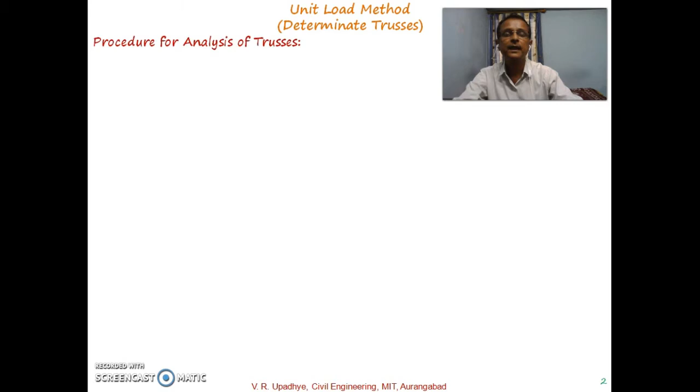In the earlier lecture we discussed the procedure used for analysis of trusses using the unit load method, for finding horizontal or vertical deflection at a particular joint. We will again go through the stepwise procedure.

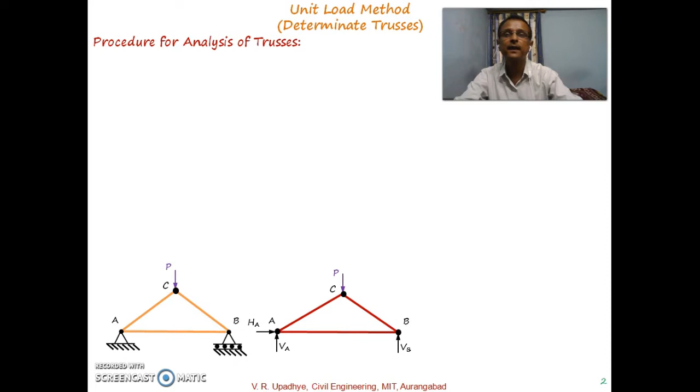Say a truss is subjected to a point load P at, for example, joint C as shown in this figure. At B there may be horizontal deflection taking place, and if we want to find the horizontal deflection due to the forces, first of all we find the reactions at the supports due to the applied external forces.

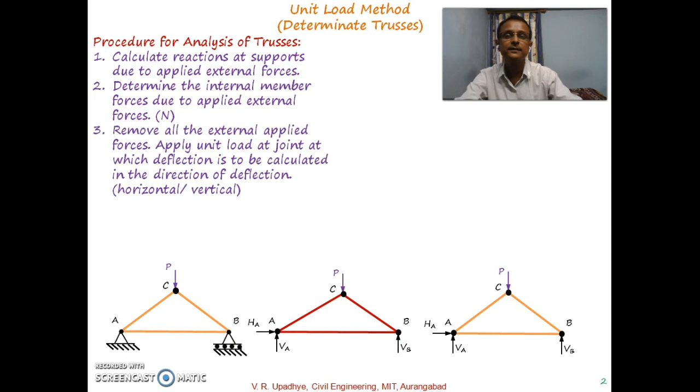We go further to find the internal member forces due to the applied external forces, and then we remove all the externally applied forces and apply a unit load at the joint where deflection is to be calculated, in the direction of the deflection.

For example, if we are interested in finding the horizontal deflection at joint B, we remove the externally applied forces and apply a unit load at that particular joint in the direction in which the deflection is to be calculated.

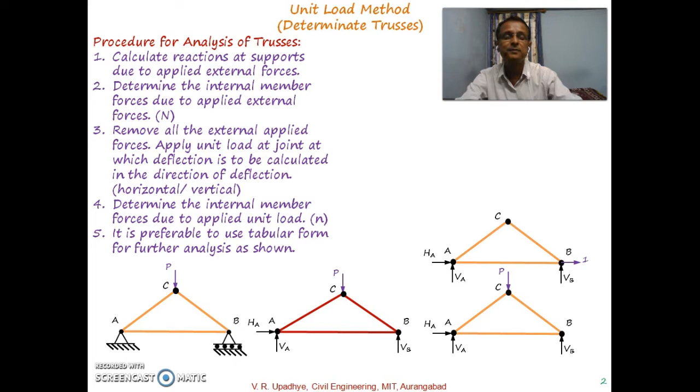Then, as shown in this figure, we find the internal member forces due to the applied unit load at that particular position. Then we set up a table. It is preferable to use a tabular form for further analysis, as shown here.

The table has columns: member, then capital N, which stands for internal member forces due to applied external forces, and small n, which stands for internal member forces due to application of the unit load at the joint in the direction where deflection is to be calculated.

Capital A stands for area of cross section of that member, and capital L stands for length of that member. We then calculate N, n, L divided by A. If Young's modulus is different for different members, we need one more column for it; otherwise, if it's the same, it's not required in this calculation.

We then take the summation of that column to find delta, which is the summation of N, n, L divided by A. With this, we will go through a second numerical regarding this method.

We need to take proper care of units. If N, the internal member force due to externally applied forces, is in kilonewton, and area of cross section is in millimeter square, and length is in meter, then while substituting everything in the final calculation, convert everything consistently, for example into Newton and mm, so the answer comes out in mm. You need to take care of the units used for N, small n, area of cross section, and length of the members. So we will go through one more numerical on this methodology.

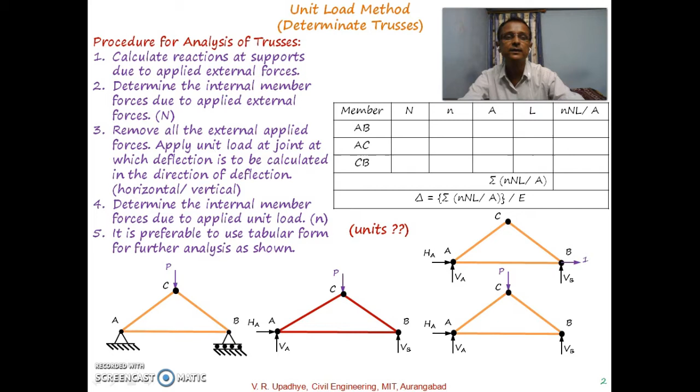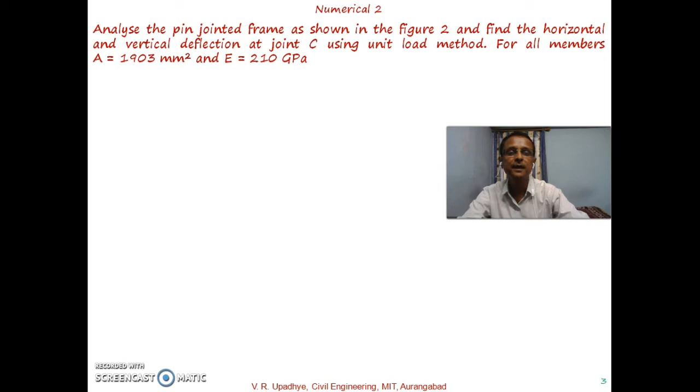This is the statement of the numerical: analyze the pin jointed frame shown in figure 2 and find the horizontal and vertical deflection at joint C using the unit load method. For all members, area of cross section is 1903 millimeter square and Young's modulus is 210 gigapascal. This is the diagram given.

What we have is this truss with 5 members: AB, BC, CD, AD and BD, with supports as shown in the diagram - one is a hinge support and the other is a roller support.

It is subjected to external forces: 18 kilonewton vertically downward at one joint, again 18 kilonewton at C, and at joint B there is one more force applied, 12 kilonewton inclined at 40 degrees. With this we go to the solution: initially we need to find the reactions due to the externally applied forces.

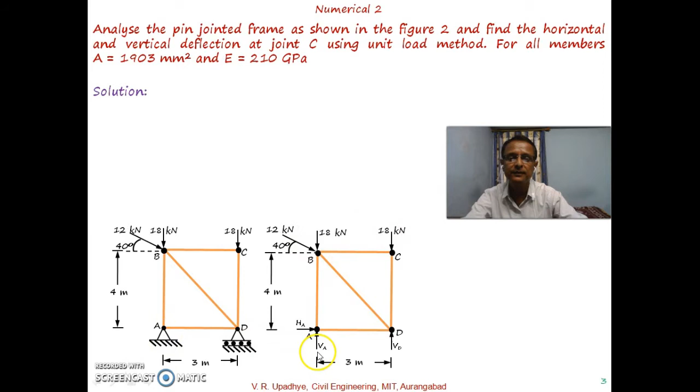So you will be having two reactions over here as it is hinge support, so we will be having vertical reaction as well as horizontal reaction. And as D is a roller support, we will be having one vertical reaction over here. So reactions at supports are as shown in figure 2A and figure 2B.

If the vertical reaction at D is to be calculated, you need to apply summation of moments about A equal to 0. Going through this figure, we have an 18 kilonewton force at C, an 18 kilonewton force at B, and at B one additional inclined force, 12 kilonewton at 40 degrees.

It is converted into its two components, horizontal and vertical. The horizontal component becomes 12 into cos of 40, which calculates to 9.193 kilonewton, and the vertical component is 12 sin 40, which comes to 7.713 kilonewton.

After these calculations, if we apply summation of moments of all the forces about A equal to 0 at support A, we get an equation like this. For the force 9.193, the component 9.193 into 4 gives the moment about A. The 18 kilonewton force and the vertical component of the 12 kilonewton force pass through point A itself, so their moment is 0 about A.

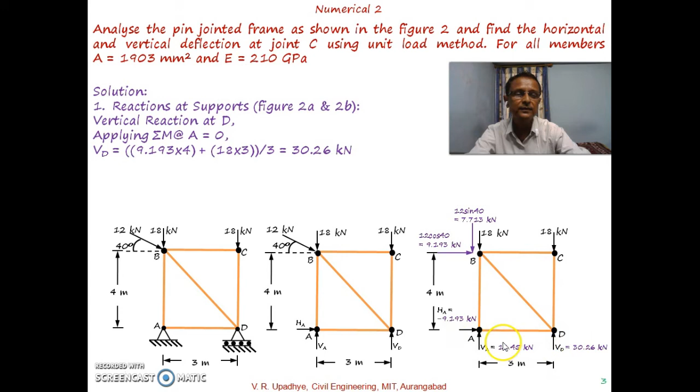So VD becomes 9.193 into 4 plus 18 into 3, divided by 3. That calculation gives the reaction at support D as 30.26 kilonewton.

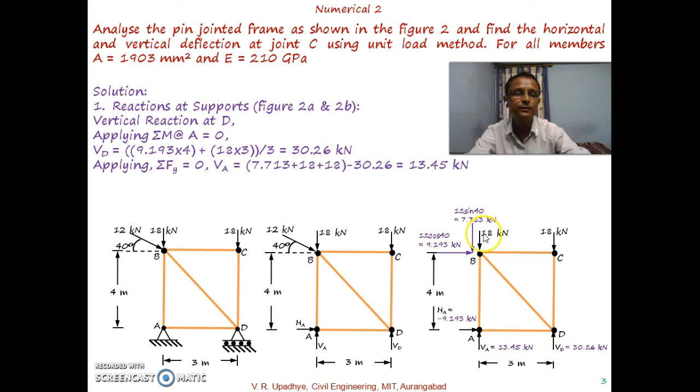Now we can apply summation of forces in the y direction equal to 0. So VA plus VD must equal 18 kilonewton plus 18 kilonewton, plus 7.713, the vertical component of the 12 kilonewton inclined force. So VA becomes 7.713 plus 18 plus 18, minus VD, which is 30.26, giving the vertical reaction at A as 13.45 kilonewton.

Similarly, the other reaction at support A is horizontal. Applying summation of forces in the x direction equal to 0, there is only one horizontal force, the horizontal component of the 12 kilonewton force, which is 9.193 kilonewton. For summation of x equal to 0, the reaction in the x direction must be opposite to that, so it is minus 9.193, or in the negative direction. That is the horizontal reaction at A, 9.193 kilonewton in the other direction.

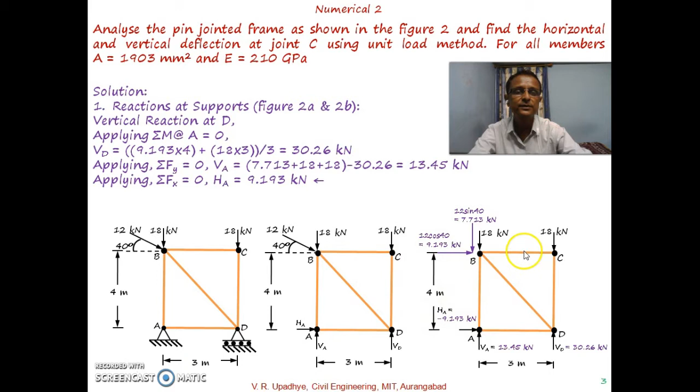With these reactions calculated, what we need to go for next is finding the member forces due to the applied external forces. So we'll go for that.

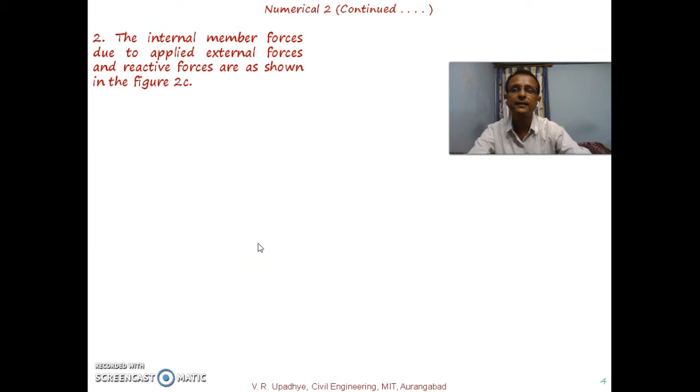The internal member forces due to applied external forces and the reactive forces are as shown in figure 2C. Here we will have some internal forces. To calculate this, considering joint A and its equilibrium using the method of joints, I will have member force FAD horizontally and member force FAB vertically. Since this reaction is in the negative x direction, the member force here will be in the positive x direction.

Again, if we consider joint D, there must be an opposite force. So the member force in member AD becomes 9.193 kilonewton tension. Considering summation Fy equal to 0 at joint A, since VA is vertically upward, the internal member force FAB at joint A must be vertically downward. So this internal force becomes compression, 13.44 kilonewton.

Similarly, if we go through joint C and draw its free body diagram, applying summation Fx equal to 0 and summation Fy equal to 0 using the method of joints, we find there is no externally applied horizontal force at joint C. So the member force in member CB must be equal to 0, since there is no other force acting over here.

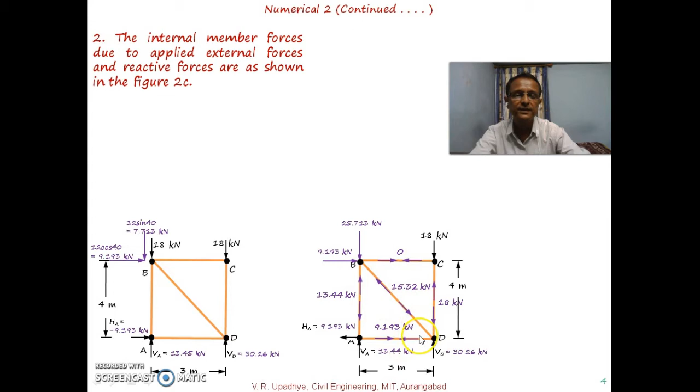As there is no horizontal force at joint C, now these four internal member forces are known. We can calculate the member force in member BD. Applying summation Fx equal to 0 at joint D gives us 9.193 kilonewton force, which is tension in member DA. Considering the horizontal component of FBD, FBD cos theta must equal 9.193. Calculating this gives us 15.32 kilonewton, which is compression.

This is written in tabular form. We have 5 different members: AB, BC, CD, DA, and BD inclined. The internal member forces due to externally applied forces are 13.44 in member AB, which is compression, written as negative. In member BC it is 0. In member CD it is 18 kilonewton compression, written as minus 18. In member AD it is 9.193, tension, so positive. And in member BD, the inclined member, it is 15.32 kilonewton compression, written as negative.

And lengths of all the members: member AB has length 4 meter. For BC and AD, it is 3 meter. For member CD, it is 4 meter. For member BD, since it is inclined, calculating with 4 meter and 3 meter gives us 5 meter. With this we will proceed further, because we need to find the horizontal deflection taking place at a particular point.

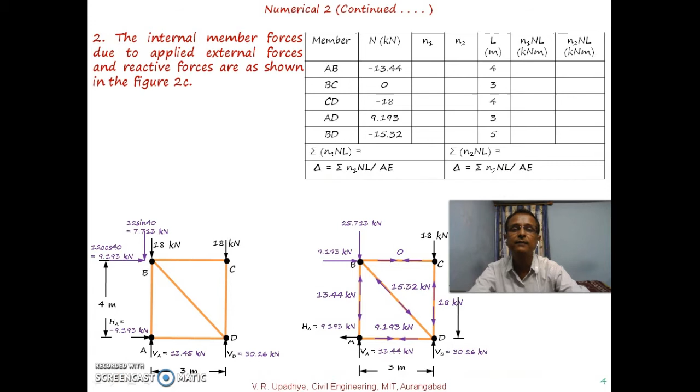We need to find the horizontal deflection at a particular point, so we will go for further calculations. To find horizontal deflection at C, we will apply a unit load at C as shown in the figure, and then calculate the member forces due to that unit load.

If I apply a unit load which is horizontal at joint C, where we want to find horizontal deflection, then the reactions at supports can be calculated using summation M about A equal to 0. Considering this joint and applying summation M at this support equal to 0, for this force it becomes 1 into 4, clockwise, and VD for this reaction becomes VD into 3 in opposite direction. So VD becomes 1 into 4 divided by 3.

This calculation gives VD as 1.33 kilonewton. There is no other vertical force as such, only this VD reaction of 1.33 kilonewton. For summation of forces in y direction to be 0, vertical reaction at A, Va, is 1.33 kilonewton in opposite direction. So these two are 1.33 kilonewton, upward at support D and downward at support A.

For summation of forces in x direction equal to 0, since this is a unit force applied, the reaction over here must be opposite to that. So this gives 1 kilonewton in opposite direction.

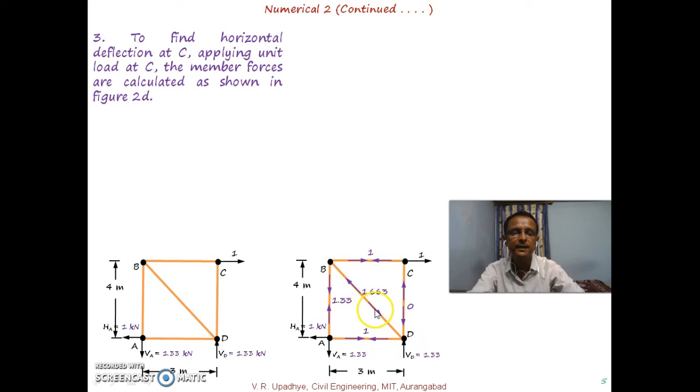That calculation gives us the member force in member BD as 1.663, and it should be opposite to member force DA at joint D. So if DA is tensile, DB will be compressive. That again can be written in terms of a table, which we'll do afterwards.

If a unit load is applied vertically at joint C, and we apply summation of M at A equal to 0 to find the reaction at D, the equation becomes: 1 into 3 minus Vd into 3 must be equal to 0. So Vd becomes 1 into 3 divided by 3, giving Vd as 1, opposite to this force.

For summation Fy equal to 0, as this is 1 and Vd is 1, there is no other force, so Va must be equal to 0, and there is no externally applied horizontal force, so horizontal reaction at A must also be equal to 0. Since these two externally developed reactions are 0, the internal member forces, force FAD in member AD, and internal member force in member AB, must be 0.

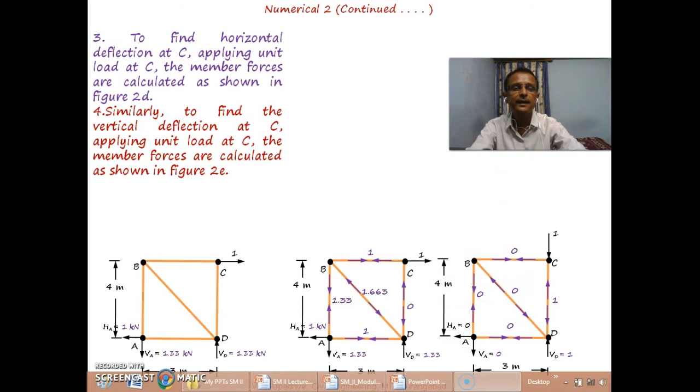So we can again go through that table: the column member N, that is member forces due to applied external forces, and length, this column was already written. We calculated the member forces due to unit load applied horizontally at joint C, where horizontal deflection is to be calculated, so we write it in this column as N1. So AB is 1.33, which is tensile. Then BC is 1, which is again tensile. For member CD it was 0, so this is 0.

For member AD it is 1, which is tensile. And for member BD, that is 1.66, which is compression, hence it is written as minus 1.66.

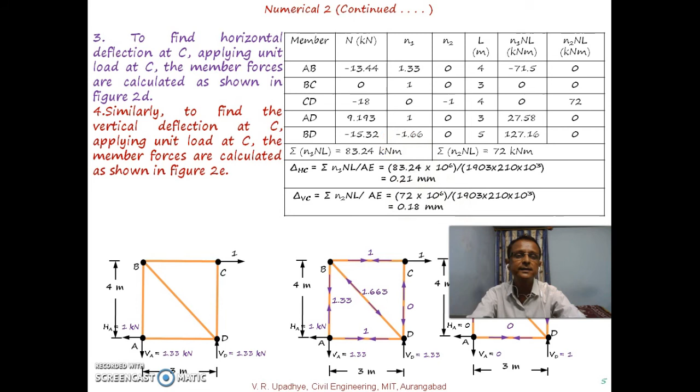Similarly, if we want to calculate vertical deflection taking place due to the externally applied forces, this unit load was applied, and due to this there is only internal member force in member CD, which is 1 as compression, written as minus 1 in N2. In other members, that internal member force is 0.

Now with this, we can calculate N1 and L. What we want finally is summation small n and capital N L divided by AE. So we'll go for that calculation in this column: one is for N1, and another column is for small n2 — this for unit force applied horizontally, and this for unit load applied vertically, that is small n2.

This calculation gives us all these values for N1 and L. So this 13.44 multiplied with 1.33 and length 4 meter gives us 71.5 kilonewton meter.

Similarly, all these calculations are done. For N2 and L, small n2 multiplied with this 13.44 becomes 0. So only at CD, it will give us minus 18 into minus 1 into 4, which gives plus 72.

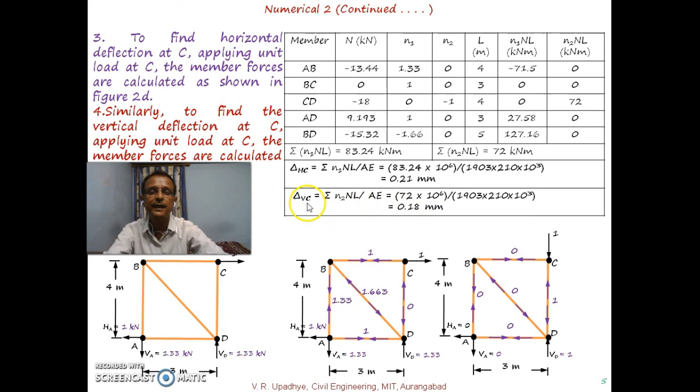So summation N2 and L is 72 into 10 to the power 6, converted from kilonewton meter to Newton mm, divided by area of cross section 1903 for all members into 210 into 10 to the power 3. That gives us 0.18 millimeter, which is delta VC, the vertical deflection at C due to applied external forces.

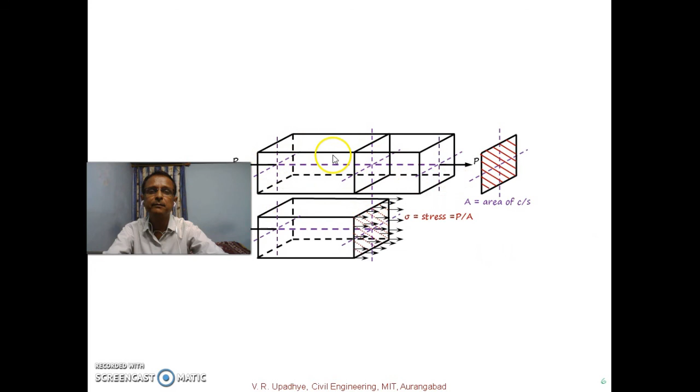So what is happening internally? Try to understand that. If I cut it over here and consider this part of the member, internally there will be stress in the direction opposite to this force, and that will be P divided by A. If I consider this other part of the member, the internal force will again be the same, P divided by A, that internal stress, throughout this cross section.

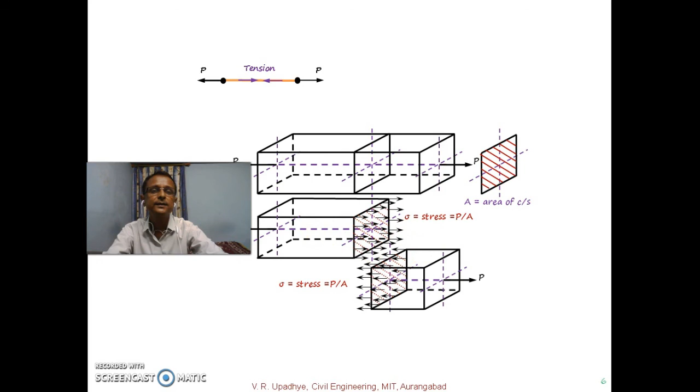Now considering internal member forces: for this part of the member it is in this direction, and for this part it is in this direction. This internal force is called tension. However, if it is opposite to this, then it will be compression. So you need to remember that this is tension and this is compression.